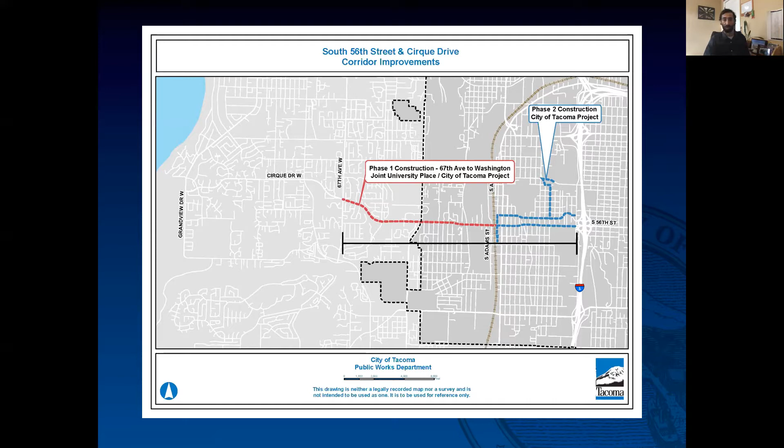Next, I'll be going into the schedule. The design of phase 2, as I mentioned, has been ongoing, and we anticipate completion by the end of this year for design.

From there, we anticipate advertising the project in early winter 2021. Phase 2 construction is expected to begin late spring or early summer 2021, with a duration of about a whole year. However, the impacts will not be as long to the whole project corridor, as we anticipate the contractor tackling the project in pieces rather than all at once.

I'll go into the budget now. The design of phase 2 has been ongoing for a number of years. Prior to 2016, the construction was not funded.

However, after 2016, we received some federal grant opportunity. We were awarded funding from the Puget Sound Regional Council because of the project's improvements to local and regional mobility. Construction of phase 2 is estimated to cost around $8.3 million. The federal grant the city received covers approximately $7 million of that.

The city is providing an additional $1.3 million of funding from the Streets Initiative funds, which is a voter-approved initiative to provide funding for city street repairs and improvements. The Streets Initiative funding was included in this project as a form of leverage to pursue the grant initially, which is done for other projects of this size as well. These funds also offer the required match to receive the federal grant funding and to cover construction costs.

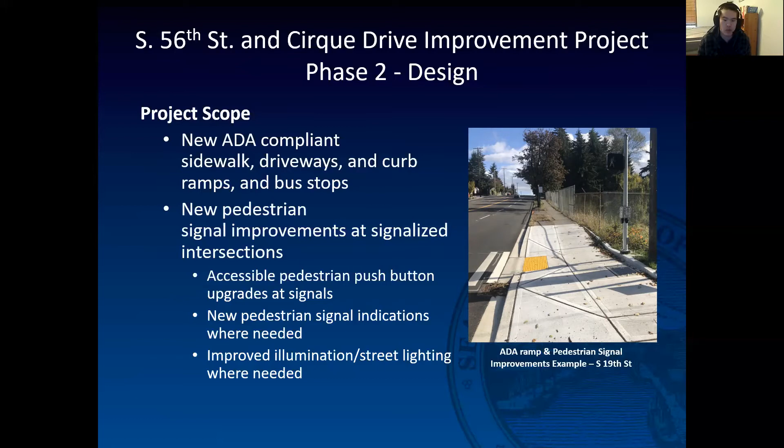Next slide. We will also be resurfacing the entire roadway from Washington to Tacoma Mall Boulevard. All existing asphalt will receive a grind and overlay. A grind and overlay is where we remove the top few inches of existing asphalt and place down the exact amount of asphalt that we removed, creating a new driving surface and improving the overall strength of the roadway.

We will be removing and replacing all of the concrete pavement as well, with new curb and gutter installed as necessary along the entire corridor, such as to install these new ramps, driveways, and any locations where curb and gutter is damaged. There is a sanitary main replacement requested by our Environmental Services Department, located between Puget Sound Avenue and Warner Street. The average depth of the sanitary main is about 13 feet deep, and we will be replacing it exactly where it's at right now. Lastly, there is no change in the lane configuration along South 56th Street.

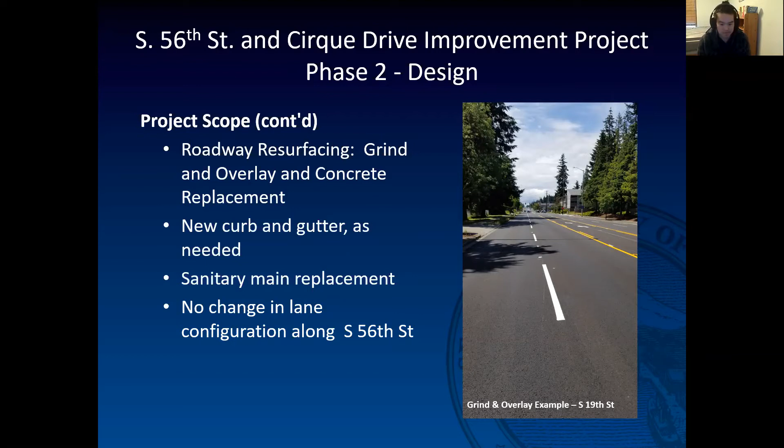Next slide. Along with the improvements on South 56th Street, we will also be doing a few more improvements, including bicycle accommodations connecting the South Tacoma Sounder Station and Tacoma Mall Transit Centers. We'll go into that in more detail with Liz in a few slides.

There will be some project-wide parking changes, primarily along Washington Street. Due to the lane configuration on Washington Street, the current parking will need to be reorganized to comply with current parking standards. This will result in some parking reductions along Washington from 56th to 58th Street and from 56th to 54th Street.

We will be installing intersignal communications where needed, and grid smart camera detection on South 54th Street to accommodate bike lanes. At South 47th, primarily at South 47th and Oakes, we will be doing additional pedestrian improvements such as curb ramps, pedestrian push buttons, and pedestrian signal heads as needed.

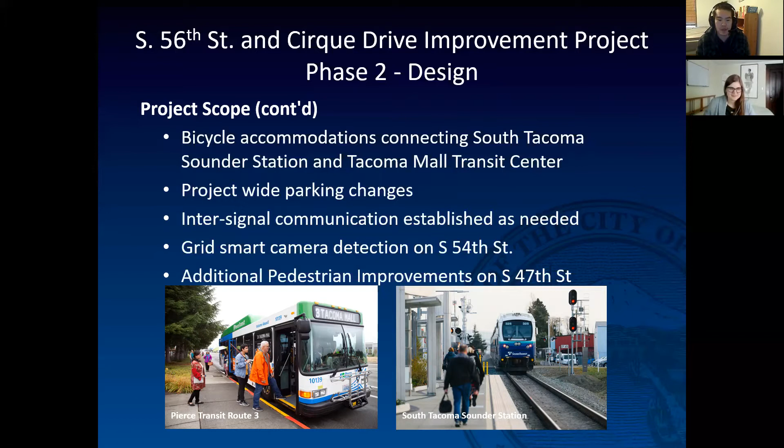That concludes my slides, and I would like to pass this on to Liz to discuss active transportation as it relates to this and the proposed bicycle accommodations. Liz? All right, thank you, Brian.

I'm Liz Kaster, a senior planner in the Public Works Department and the city's active transportation coordinator. Today I'll start high level, talking about our transportation policies and how we make planning and design decisions. Brian already shared information on pedestrian improvements along South 56th Street, and I'll share the specifics of what bike facilities are planned as part of the project, then wrap up by showing how this project fits in with Tacoma's bikeway network overall.

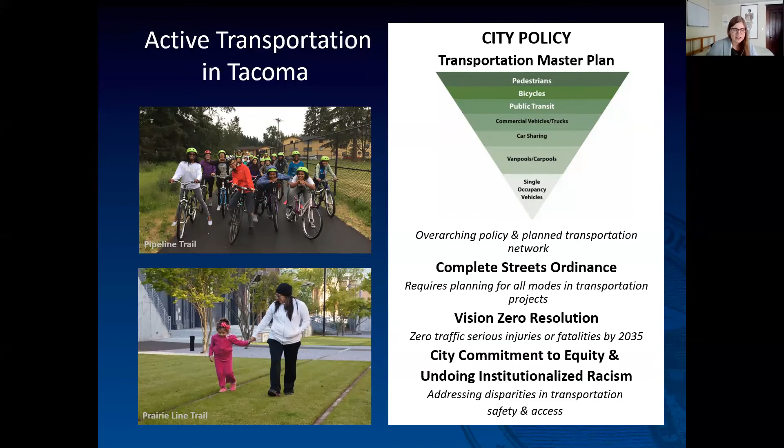The policies I just mentioned provide the foundation of why we plan for active transportation. When it comes to prioritizing active transportation projects, selecting routes, and developing design, city staff, along with stakeholders like our volunteer bicycle pedestrian technical advisory group, focus on three main themes: equity, safety, and connectivity.

The City of Tacoma has an equity index that looks at access to opportunity across the city. We use this data to help us prioritize infrastructure investments. According to the Equity Index, the neighborhood surrounding this project is more racially diverse, lower income, and includes a higher percentage of individuals with disabilities than the city as a whole.

In Pierce County, low-income individuals are more likely to bicycle and take transit than higher-income folks. Walking rates are consistently high across income levels. While that survey didn't include race and ethnicity, national data indicates that people of color are more likely to walk and bike than white folks.

While we're working to make all of our streets safe and accessible for walking and rolling, we prioritize investments in neighborhoods like South Tacoma, where we see greater disparities in safety and access. As part of our analysis, we also look at safety data like crash history and design our infrastructure to improve the safety of all users.

Connectivity is also a key consideration. We look for opportunities to fill gaps in our transportation network and create safe routes for folks to access jobs, transit, schools, local businesses, parks, and daily destinations.

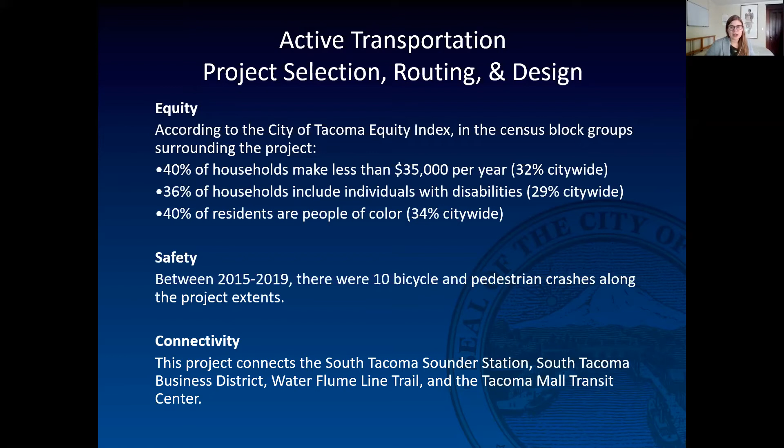On the next slide, we'll see a plan design for South Washington Street from 58th Street, where we tie into existing bike lanes, to 56th Street. We've got a two-way parking protected bike lane, also known as a cycle track, on the west side of the street. These will be Tacoma's first parking protected bike lanes, meaning that instead of having vehicles park against the curb, the parking lane is placed between moving vehicles and bicyclists as an added buffer and protection. We'll use green paint at the driveways to identify potential conflict points.

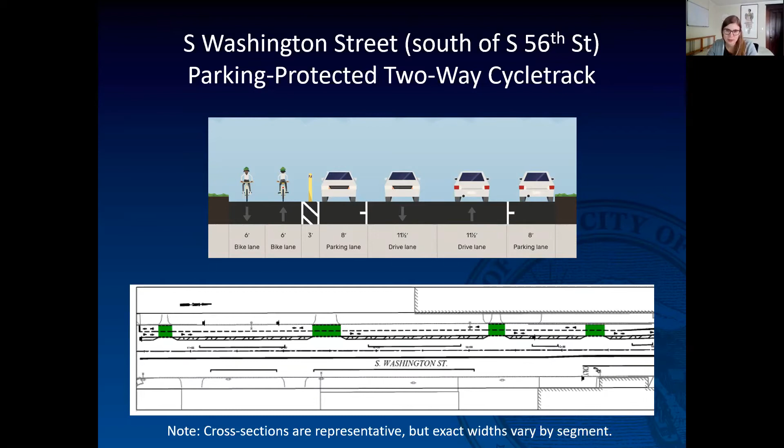On the next slide, you'll see we then transition to one-way parking protected bike lanes from 56th to 54th. This is also on Washington Street.

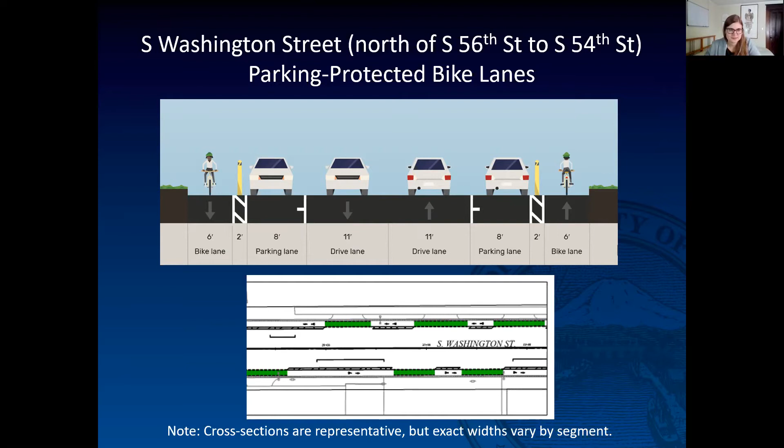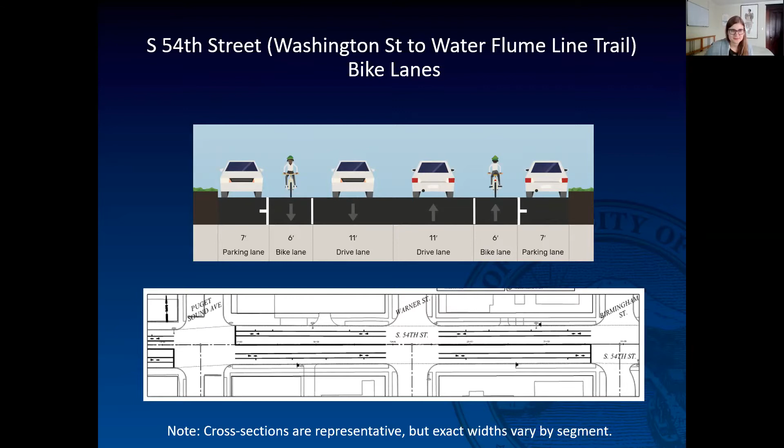On the next slide, we've got 54th Street, the longest east-west segment of our bike facility. From Washington to the Water Flume Line Trail, we've got traditional bike lanes with parking curbside. Continuing along 54th past the Water Flume Line Trail, which transitions to Railroad Street, we've got shared lane markings, also known as sharrows. Sharrows are also included north-south on Fife Street and south 48th for one block. These markings reinforce that this is a shared street and bicyclists may use the full lane.

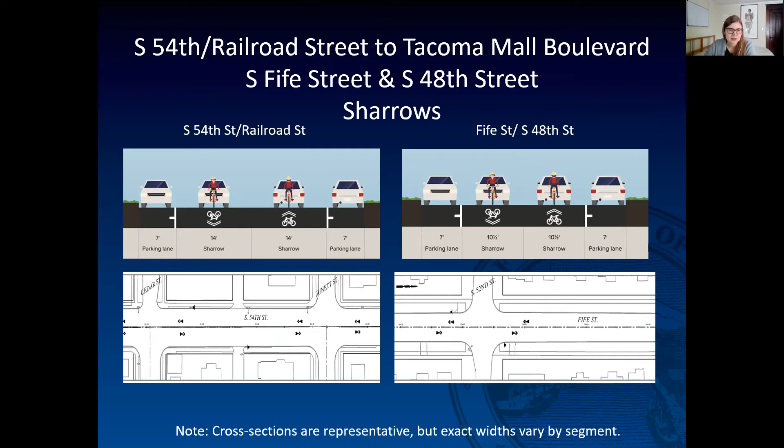On the next slide, we'll come back to our overview map just so you can follow along to where we are.

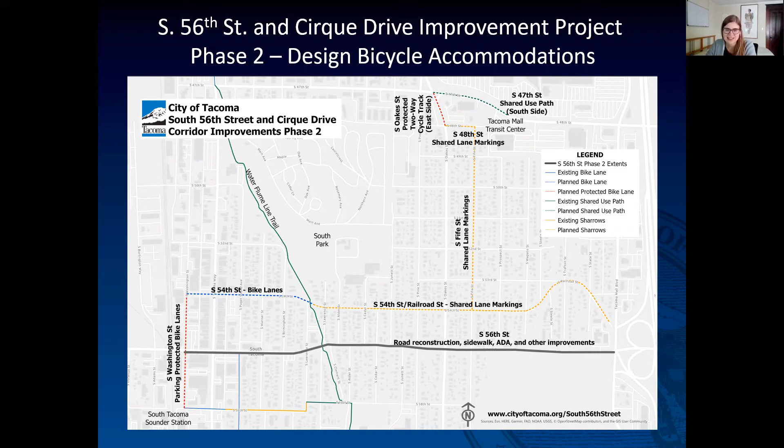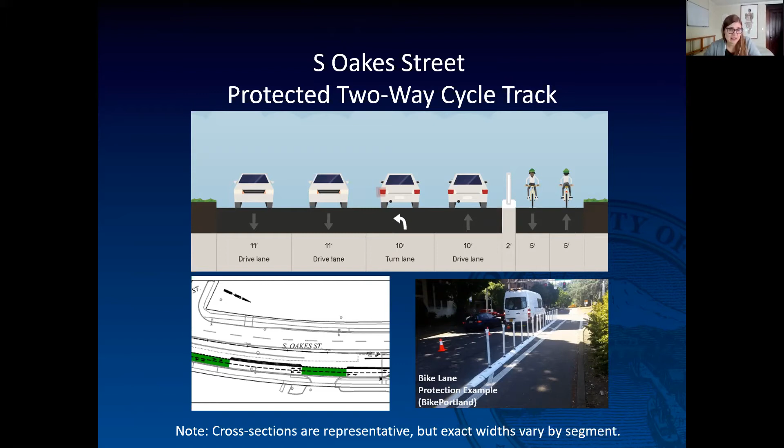Now that brings us to the corner of South 48th and Oakes. If you go to the next slide, we've got a two-way cycle track on the east side of the road. This segment will be protected with a bolt-in rubberized curbing, which you can see in the bottom right-hand photo. And then finally, we've got an 8 to 12 foot shared use path on the south side of the road on South 47th, which will connect into the Tacoma Mall Transit Center.

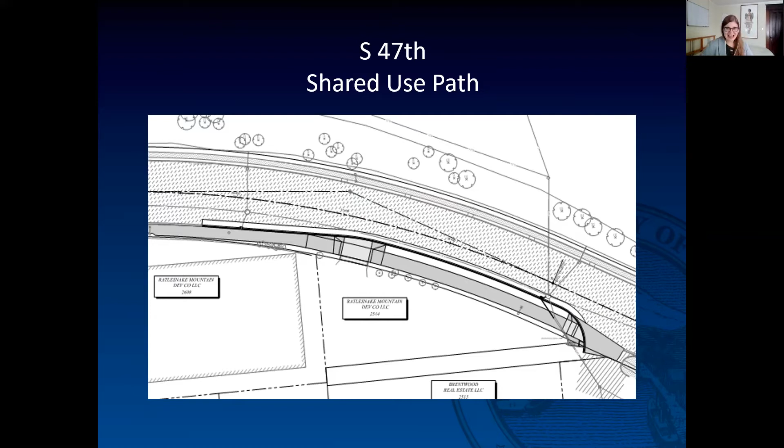Now I'm going to pass this over to Troy Stevens with the City of Tacoma Public Works Department, who will provide more details on the right-of-way for this project.

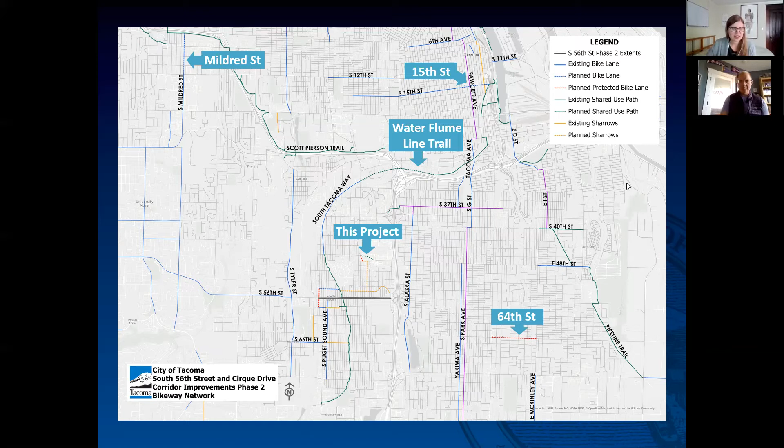Thank you, Liz. It's a pleasure to be here today with everyone. My name is Troy Stevens, and I'm with the Public Works Real Property Services Group, and in Real Property Services we manage the city's streets and alleys.

Most of what you've seen today from both Brian and Liz, those improvements happen in the right of way or plan to be in the right of way. But you might be asking yourself, well, what happens if my property is needed for part of this project? Well, you'll be happy to know that for the last year, Real Property Services has been working with the affected property owners in the project to acquire any additional rights of way that we possibly needed.

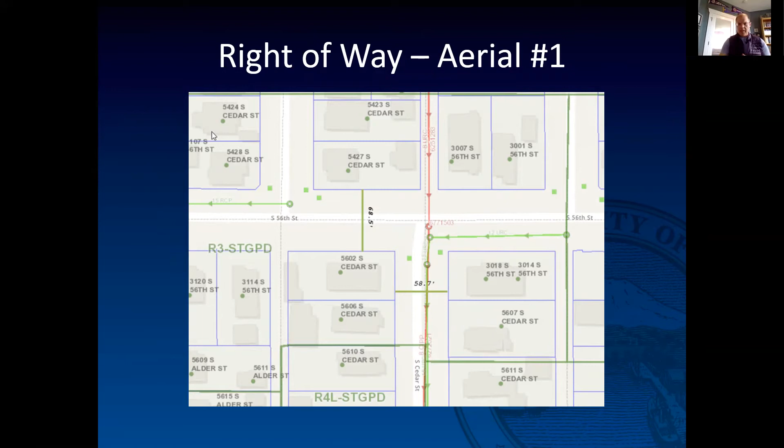Now, what governs this is something called the LAG manual, which is the state, and the Uniform Act, which is the federal code. We work within these two code sections and with these agencies to make sure that we follow the rules to keep everyone safe, negotiate safely, and follow the rules of acquisition. We do things like appraise the property. We have forms that are reviewed, letters, easements that are all reviewed by the state to make sure we're following the rules in these property acquisitions.

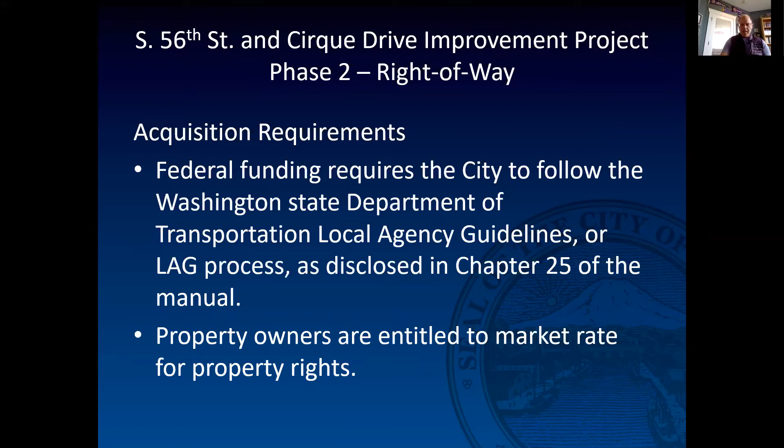Now you might be saying, well, what are you acquiring? On South 56, we acquired various types of property from private property owners, and these sections were relatively small in comparison. No one's entire property was bought as part of this road project. What typically happens is we're acquiring a little bit of extra property for an ADA ramp or to build a wall. With temporary construction easements, we'll oftentimes need just a little sliver, maybe 2 feet behind the sidewalk, between that heavy property line and the sidewalk. So we'll sometimes need to acquire a small area like that to allow our construction teams to build the sidewalks they need, or to reconstruct an ADA ramp.

The dedication deeds, the reason we acquire those, is that if there's a section of someone's property that we need to not just temporarily occupy, but permanently, we'll get a deed or a right-of-way dedication deed. We didn't have that many on this project. Most of our acquisitions were temporary, lasting just the term of the construction.

There is one other type of document we sometimes need, and currently we're not negotiating any, and that's the driveway reconstruction permits. What typically happens is during construction, the engineers realize that, for instance, a car might bottom out on a driveway, or there's some feathering that needs to happen, something unexpected when the project was being engineered. That's when we get the temporary rights. But for the most part, we don't foresee needing any additional property rights.

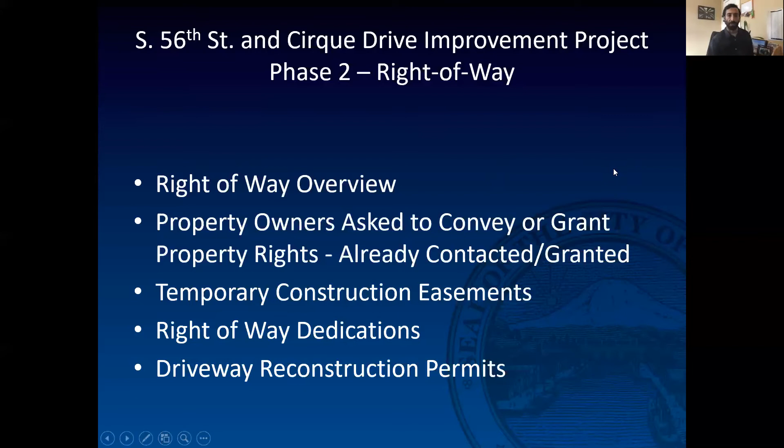Thank you. As mentioned before, the duration of the project is approximately one year long. The overall mobility in the corridor will remain intact, although there will be some inconveniences like delays, pedestrian detours, and/or lane closures. These can all be expected during construction.

The city expects that the contractor will maintain two ways of traffic, if I haven't mentioned that already. Once this project is complete, the improvements will provide upgraded facilities for all types of transportation.

There will also be on-street reader boards placed in areas where the construction is about to start. In addition, there will be a city inspector on site to watch over the contractor and to provide a point of contact for the public in case there are any issues.